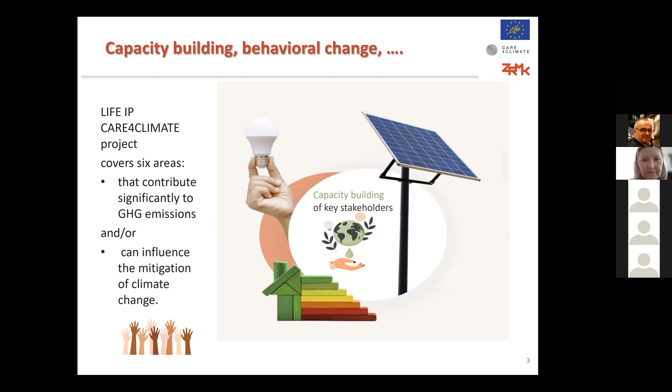In my presentation, I was asked to address the 2 important sub-projects relevant for capacity building of stakeholders. But as we are addressing nearly zero energy buildings in Slovenia in this event, I would like to draw your attention to our current activities in this sector.

From the year 2015, we have a national definition of nearly zero energy building. This is called the technical definition, and it defines the maximum energy need for heating in nearly zero energy buildings. In practice, that means all such buildings should have a demand below 25 kilowatt hours per square meter per year, or they should be ranked into class A1 to B1, which means very good thermal insulation and mechanical ventilation with heat recovery. In addition, it's required that all such buildings should have at least 50% renewables and meet the target regarding primary energy, which is closely correlated.

We have requirements for new buildings, but also for buildings that are subject to major renovation, and that is also reflected in our long-term strategy for renovation of existing buildings by 2050.

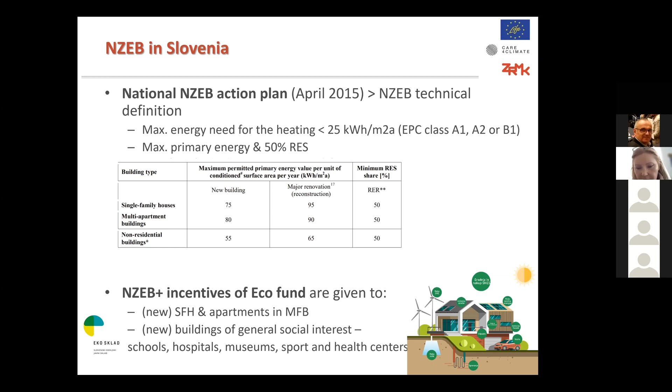In Slovenia, we are currently waiting for the new building codes, which will bring NZEB design closer to our architects and engineers, giving more practical requirements and guidelines for design of such buildings. We are just waiting for the promulgation of this building code.

We took into account the cost optimality study, new EPB standards, and the new approach required by the European Commission. We are strictly prioritizing renewable energy sources, as foreseen in our national energy and climate plan for the building sector. We also studied and updated primary energy factors so we can take into account exported energy and new arrangements for energy self-supply from local production and community solutions for renewable energy.

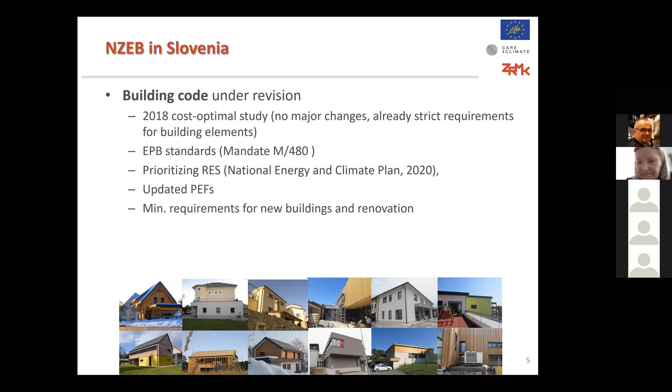What are the plans of the long-term renovation strategy for 2050? We have ambitious targets for reduction of greenhouse gases in the building sector by 70% by 2030. In 10 years we have to reach significant progress in changing existing heating systems, where heat is generated individually per building. It is foreseen that in the next 10 years, two-thirds of the systems will become powered by renewables.

An important issue is that we are not talking just about deep renovation, about at least 60% reduction of primary energy with renovation. We are working on rehabilitation of existing building stock in the sense of wider renovation. That means we will take into account seismic renovation, fire safety, and flood issues, which are becoming more important in Slovenia. Seismic renovation is especially important in Central and Eastern Europe, where this field has been a little neglected for many years because of the large investments needed.

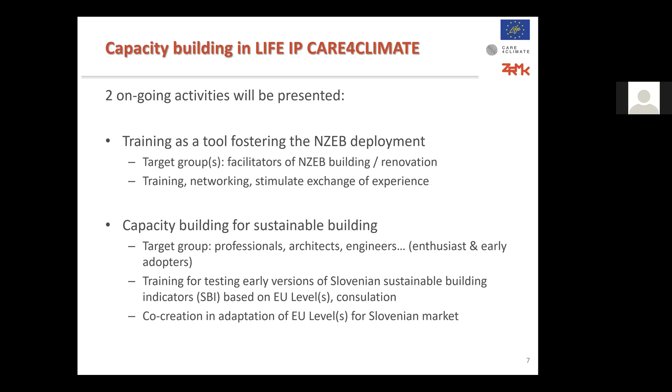What I would like to stress here is that this process is going on as a co-creation process. Stakeholders, architects, investors, and the public sector are invited, and they actually cooperate in communication on the development process.

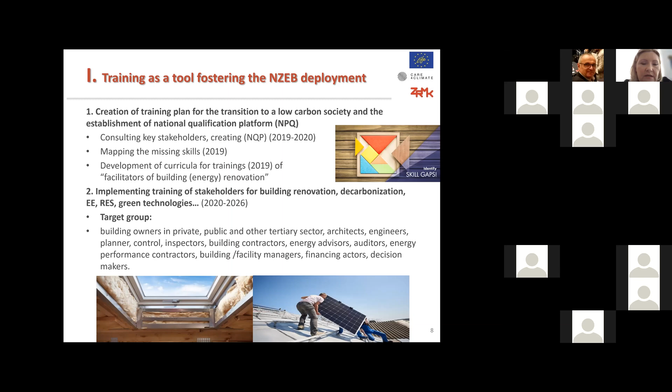How are the trainings going on in Slovenia? In the LIFE IP Care4Climate project, we started with development of a training plan, identification of topics, and mapping the needs in the sector. Back in 2019, we prepared curricula and developed the trainings.

Then we continued with development of more tailored trainings for different stakeholders: private sector, public sector, tertiary sector, architects, engineers, planners, control engineers, building inspectors, construction and building contractors, and all those offering energy services to the building sector, like energy auditors, ESCO companies, and facility managers.

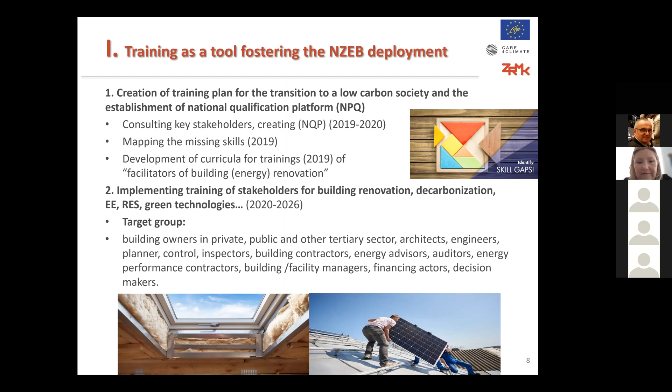We would like to attract more financing actors, banks and similar, to our training. This is currently a bit of a challenging area.

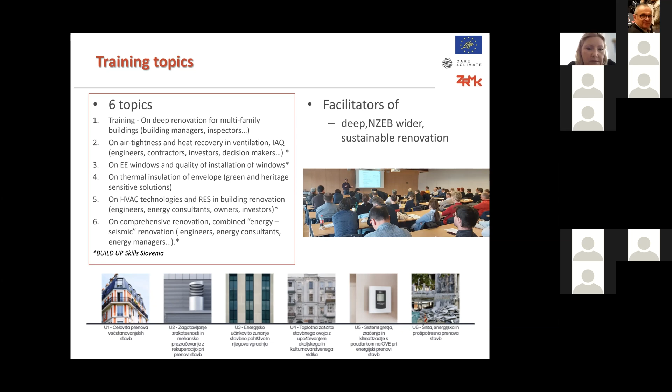We have 6 main topics of trainings. The first is deep renovation of apartment buildings. Apartment buildings are very specific in Slovenia - most of them were privatized back in the 90s, and by law they are managed by building management companies, who are important facilitators of deep renovation. We want to move our activities from just changing windows or installing insulation to deep renovation, together with planning, design, selection of good contractors, and control of implemented works.

And meeting the targets of renovation. The second topic is about air tightness and heat recovery in ventilation, and indoor air quality, which is a hot topic now in the COVID situation. Here we address engineers, contractors, investors, and all decision makers, in various details of the training. The third topic is energy efficient windows, quality of installation of windows, and advanced glazing technologies.

Also with PV elements installed in integrated facade. The fourth topic is about thermal insulation of the envelope, with a special focus on heritage buildings. We know that heritage buildings are somehow eligible for some less stringent requirements, but still many things can be done in deep renovation, also in heritage buildings.

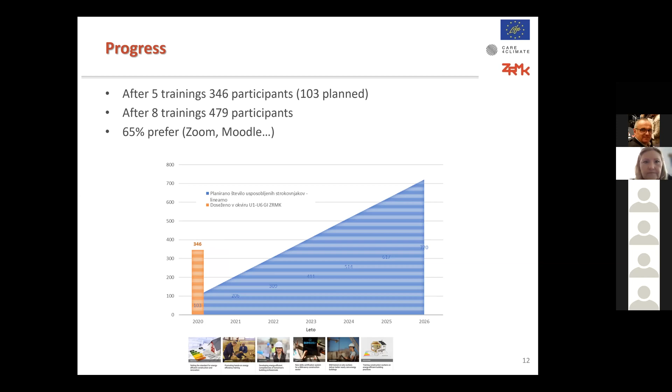So what are the open issues in Slovenia? It is clear that we need better skilled professionals. We are working with them to facilitate the preparation and implementation of renovation projects, and we are supporting them in uptake of green technologies. Nevertheless, a lot has to be done in this field. What is important is also that we have to work intensively to actually use all the financial sources which are available for public sector and also for private sector buildings.

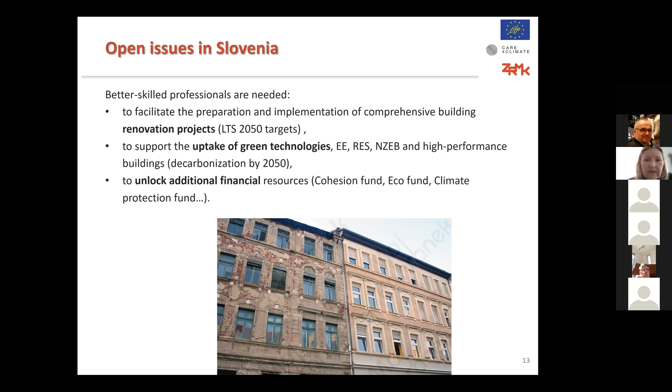The next challenge is about non-formal learning, and about getting sufficient recognition of these non-formal trainings that participants are taking part in. What we are working on is to get a legal background for development of professional qualifications for all the professionals who have already invested a lot of time and effort in gaining new knowledge. And it is important that the market of renovation becomes aware of the fact that there are professionals who have the required knowledge and skills to do deep and NZEB renovation.

The next open issue is to get the social recognition of new skills, so that the investors, the buyers of this professional service, actually become aware of skilled professionals.

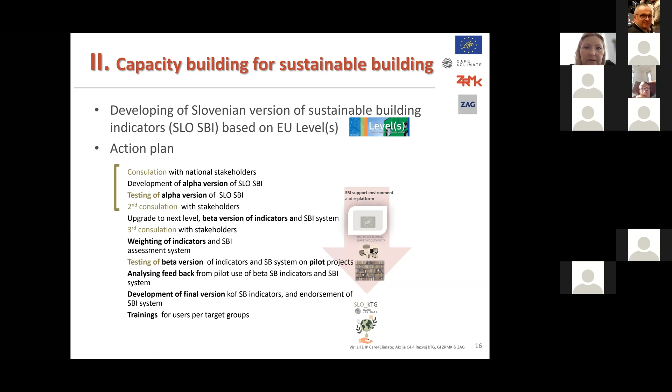And the second activity which I would like to present is capacity building of Slovenian stakeholders in the field of sustainable building. I already mentioned that we are developing a Slovenian version of sustainable building indicators based on the European framework, Level(s). We have prepared a so-called alpha version of Slovenian indicators, and those indicators are now available on our project website for all interested parties, for designers, for investors, and for researchers interested in this field. They have introductory training available.

And they have an extensive e-classroom where they can get informed about the details of the calculation of indicators. There they can also get first examples of calculated indicators, and what we are asking them is to join us to co-create the system, because next year we will start with 2 or 3 pilot projects from the very beginning in order to use the Slovenian version in real life.

The final idea of the Ministry of Environment is to integrate the Slovenian adapted indicators of Level(s) into the Green Public Procurement Regulation, and most likely also as a general rule of design for new buildings in due time.

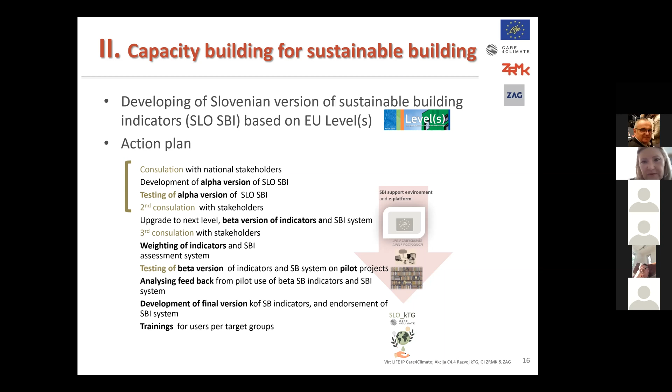The process of development of indicators is very open, so we cooperate not only with ministries, but also with institutes, with market actors, with relevant parties joined in the steering committee, and with chambers of engineers and architects, in order to come up with an implementable version of indicators for building sustainability.

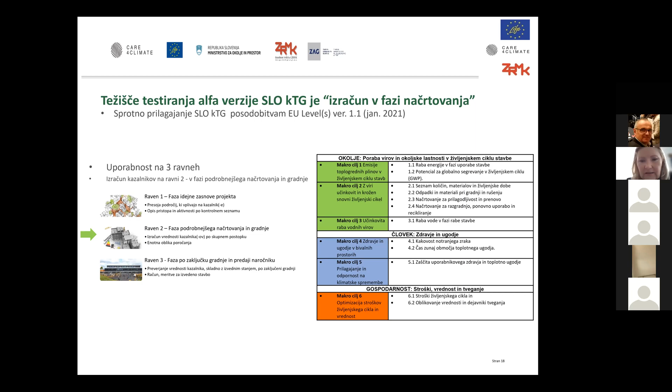By now, the scope of the testing of indicators lies in the detailed design phase. We have offered 11 indicators adapted to the Slovenian situation, with a few more in the pipeline. The aim of the testing phase is to check the applicability of indicators in the real life of project design. There we would like to learn about the methodological gaps and the data gaps.

We are aware of these problems in Slovenia. We would also like to learn how compatible the calculation of indicators is with the construction process. In this respect, I am very glad that in the next presentation we are going to talk just about that, about the relation between BIM and building energy modeling. It is important for calculation of the first sustainability indicator, about energy use in the operational phase, and also important for calculation of the CO2 footprint of the building.

We would like to get examples of calculation. There is nothing about being right or wrong in the calculation; it is just about getting feedback on what is feasible and what is the most appropriate solution for the Slovenian situation. Testing has started. We are planning hybrid events for training of all those interested in the testing process, but online presentations are also available. So we want to be as flexible as possible.

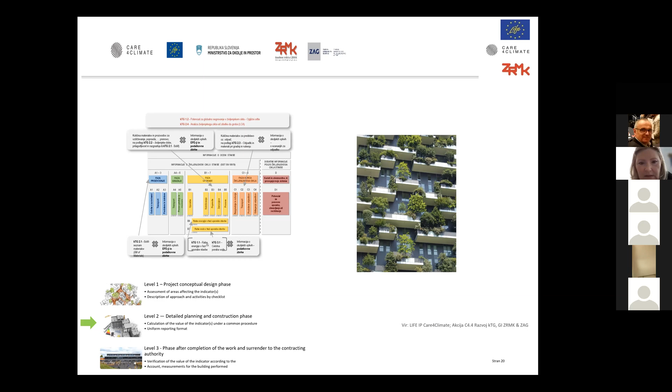This is how it looks, the video lectures and the testing platform for sustainable building. All Slovenian participants to this event are also kindly invited to join us and co-create with us the sustainability indicators for the Slovenian environment. Thank you for your effort and listening to my broken voice. Thank you very much.

Thank you, Mariana. Yes, I'm here. Don't worry, I apologize. No, I know the feeling - yesterday I had the same situation. After the whole day of meetings, I was voiceless, actually. I don't know why this is, but that's the consequence of web meetings, I think. Yeah, indeed, probably. Maybe because we are in too dry places, and that's an issue also for us talking. I don't know, this is just a thought about that.

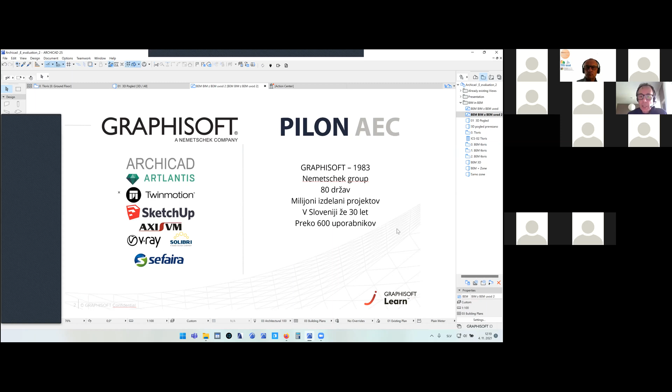Graphisoft has been around for almost 40 years. It's part of the Nemetschek Group, which currently sells and services software in more than 80 countries around the world. There have been millions of BIM projects already developed inside Archicad and other Nemetschek software brands. Inside Slovenia, we have been selling and using this software for more than 30 years, and we currently have more than 600 active users of Archicad, and this number continues to grow.

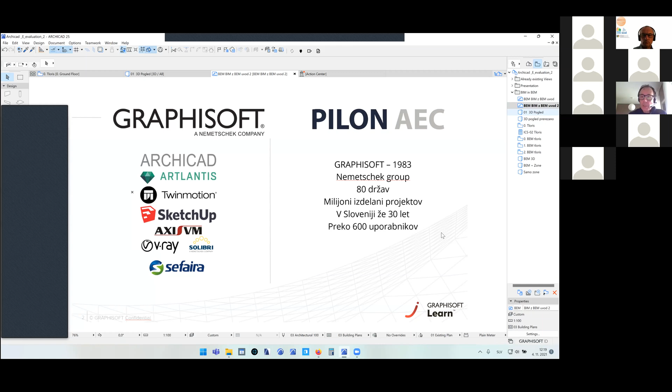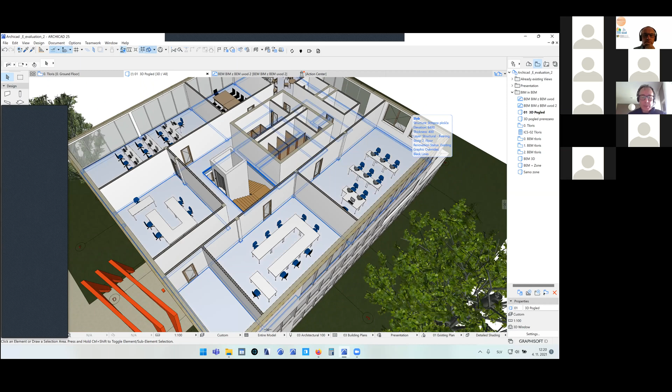So I would like to give you, in the next half an hour, a quick overview of the tools that have been available inside Archicad for more than 10 years. We are very sad that most of our users are not utilizing these tools, at least not enough for the purpose they were meant for. For the sake of this demonstration, I have a small building here. You can see it in 3D model. I can maybe cut it through one floor so you can see a little bit inside. Let's say that this building is in the design development phase.

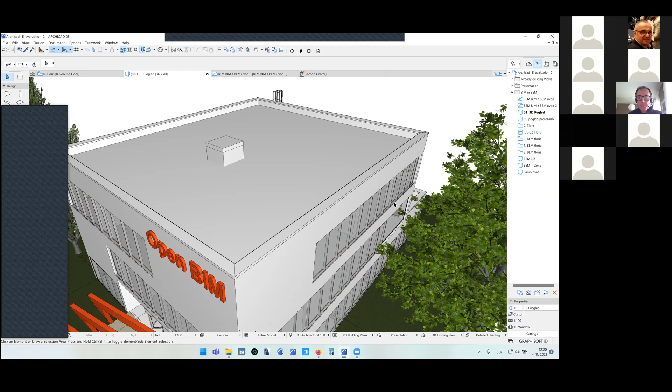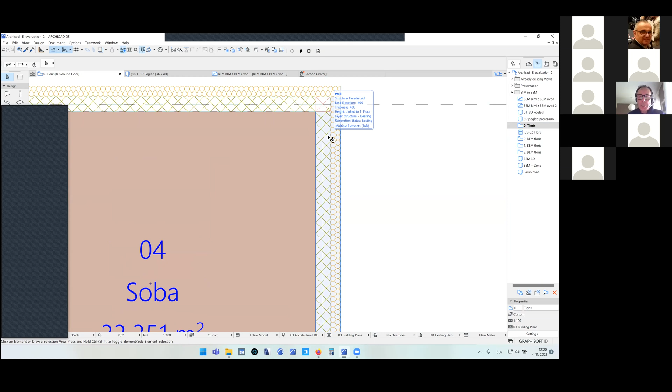For those of you who are not familiar with Archicad or other BIM tools, let me share some background on how a BIM model is supposed to work with regards to building objects. The fundamental difference between BIM modeling applications and traditional CAD software is that although these floor plan pictures may seem similar to traditional building drawings, with these hatches and graphics on screen we can represent the building materials being used in this model.

But in BIM software authoring tools, there is much more than just graphic representation of building materials. If I open section building materials here, you will see that each of these materials attached into this composite has got a lot of different properties assigned to them. For instance, this reinforced concrete has hatching, surface texture for 3D, and beside that, physical properties like thermal conductivity, density, heat capacity, embodied energy, and embodied carbon.

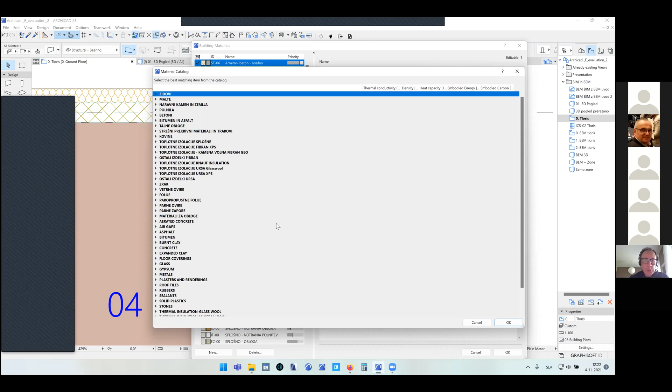Where does this information come from? It comes from a catalog built inside Archicad, and you can create your own. You can see we have international building materials, and also many Slovene building materials. If I look at insulations, these are generic insulations, and further down we have insulations from the company Fibran and, probably you recognize, Knauf insulation and Ursa glass wool. This catalog is open for manufacturers of building materials, and we can include it into pretty much every Archicad used in Slovenia.

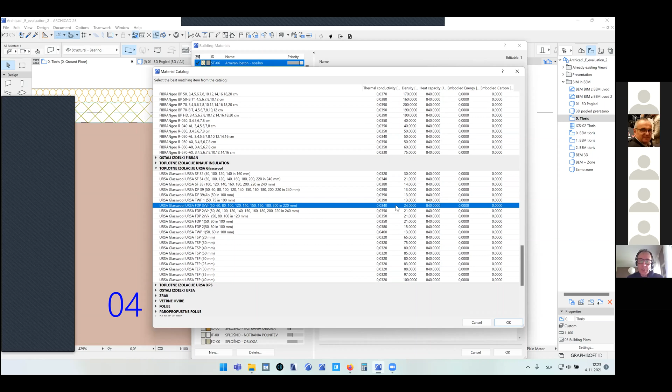For every material, we have these five categories that can be filled in. You can see that only the first three are included in the catalog, but every user can simply overwrite those numbers drawn from the catalog. For example, if he's using some special material not included in the catalog, he can overwrite these values.

The second important thing is that when we talk about BIM, we talk about cooperation between different stakeholders in the design process - architects, engineers, mechanical engineers, structural engineers, and so on. For this cooperation to be really good, elements should be properly classified when putting together a BIM model - not just elements, but also building materials.

If I choose to classify this concrete, you can see in the classification included in Archicad, we have classification by elements - walls, slabs, columns, and so on - but also classification for building materials. This classification brings to the building material much more than just these five or six properties.

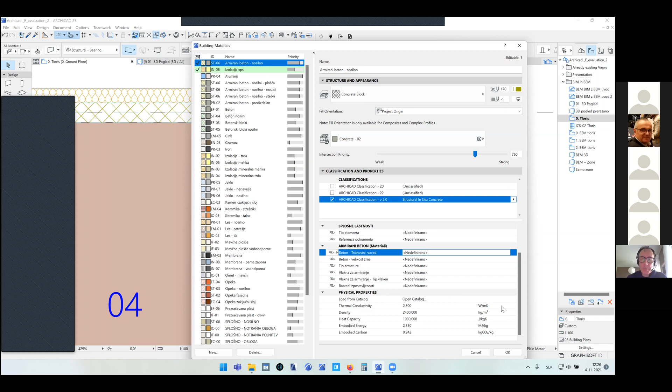If we choose some structural concrete, let's say in situ concrete, you can see that besides these few physical properties, we can define many other properties that will be included with every element using this building material. So when we send the BIM model to the structural engineer, he will get all this information. When we send it to the mechanical engineer for energy evaluation or calculation, he will get the properties significant for his work. So building a good building material library is very important.

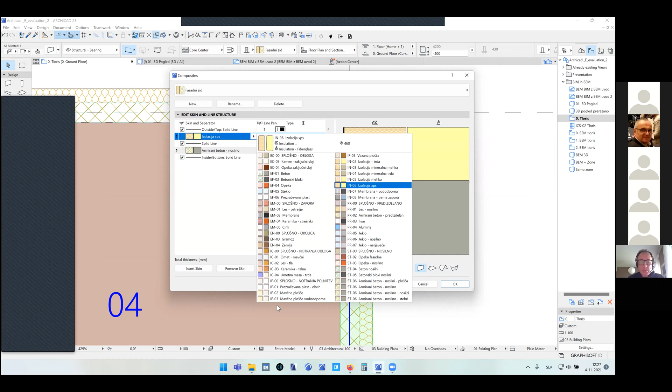The next thing is, when I choose this wall, I can see it's a composite of two materials. I can insert many other skins and materials - you can see this insulation here is XPS insulation, 18 centimeters thick, and I can choose from this building material catalog any material I would like, and assemble a composite from many different materials. This is very important when we come to the energy evaluation included in Archicad.

The next thing we need is to define our zones. In Archicad, this element is called a zone. Basically it's used for rooms, for defining the floor area of rooms, the volume of rooms, etc. But when we define these zones properly, we can then make a calculation of the energy efficiency of this building.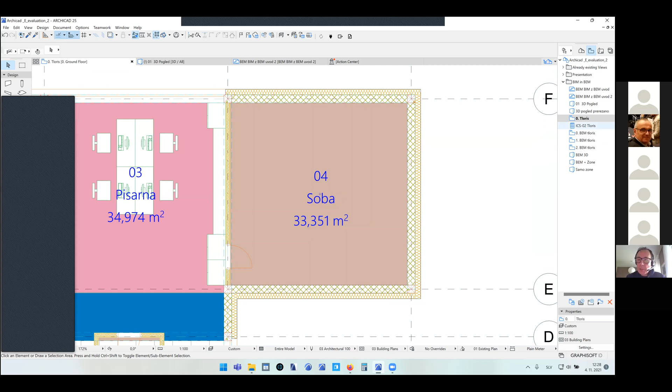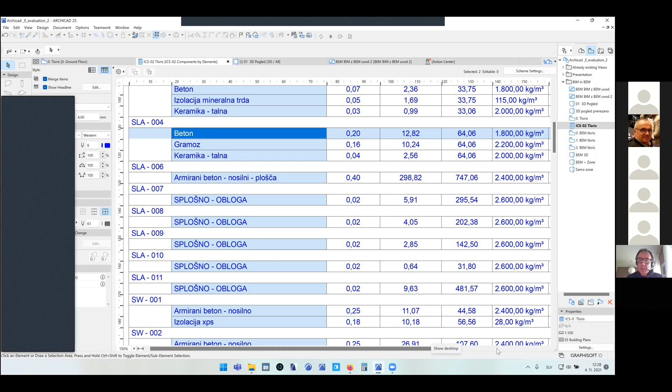So if I just show you this schedule that is created from this model, you can see that we have a lot of slabs and walls and so on. For this slab with ID 04, we have a concrete that is 20 centimeters thick. This is the area, this is the volume, these are the physical properties of this building material that I just showed you before. And this in itself is a very valuable tool to get to see what kind of materials we are using in our project.

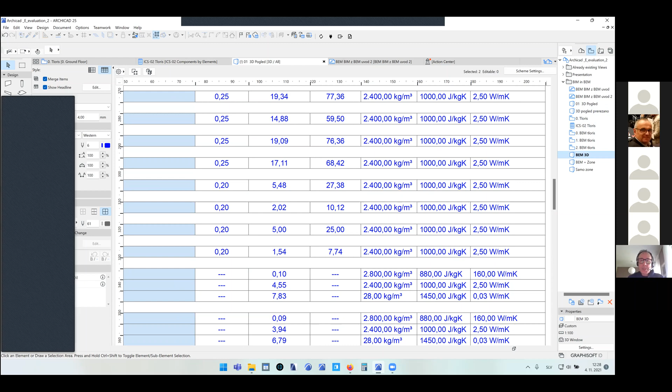But in order to get a good 3D representation of the building, a building energy model, we usually simplify our model, because every single detail can slow down the process of calculating. If the model is very exact, the calculation takes longer and errors happen faster, so to speak.

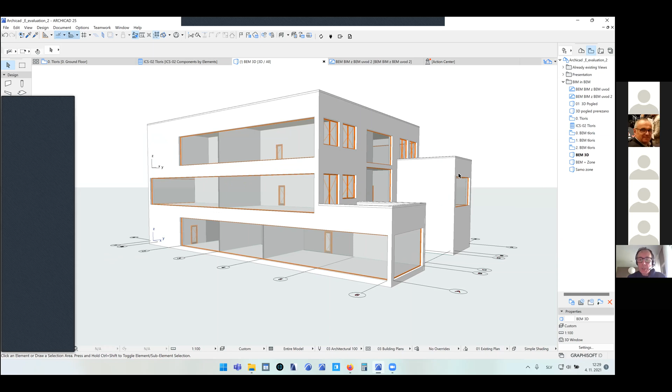So you can see this model is a little bit cleaned up, so we don't see any surroundings, trees, or furniture inside. The main goal here is to create these 3D zones that I explained earlier, which cover our building from the inside. When we are calculating a very small building, for example a residential house, the whole house can be represented as a single zone.

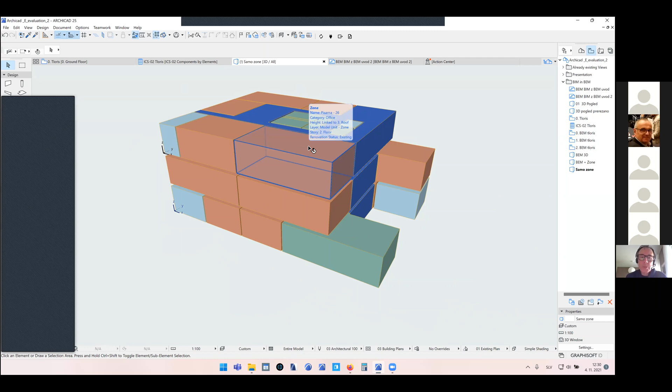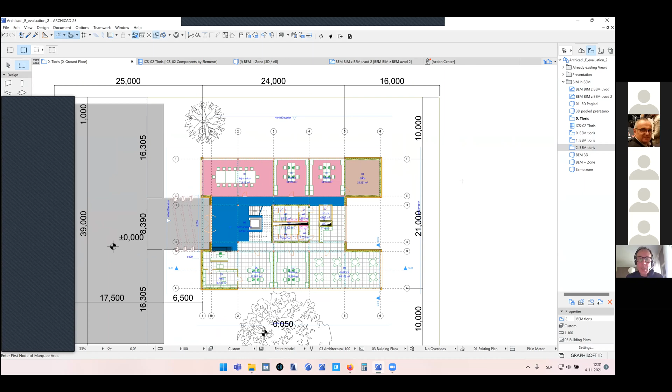These zones are typically meant to be assigned to different temperature zones inside a building. Because this is a medium-sized building, I have put zones in every room. If I show you this, you can see the model and the zones together. And if I select this area, you can see that these volumes represent the zones, the rooms.

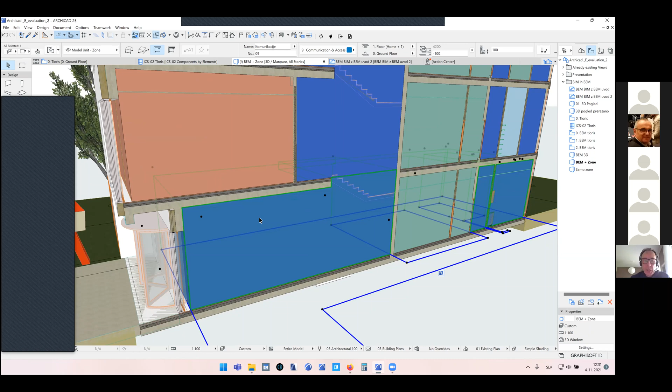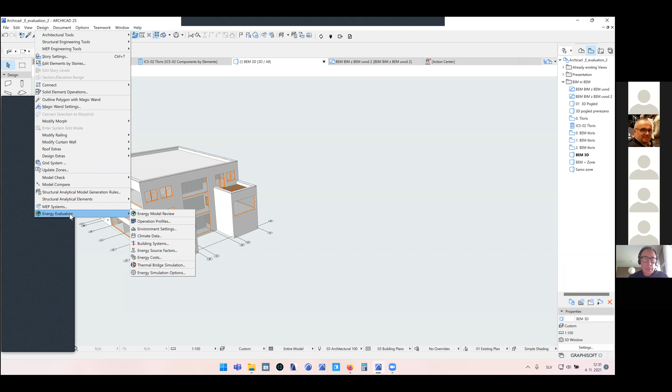Those zones must be carefully modeled. Each zone must touch the building elements precisely, so there mustn't be any gaps between the zone and the building envelope. I have already done this. This is the model, and now I will try to calculate the energy efficiency of this building.

Firstly, this is the tool I was talking about. It's called Energy Evaluation, and it has been included in ArchiCAD for the last 10 or 11 years now. I can simply hide the building elements and show only the zones, and you can see I have here two major thermal zones included in this building.

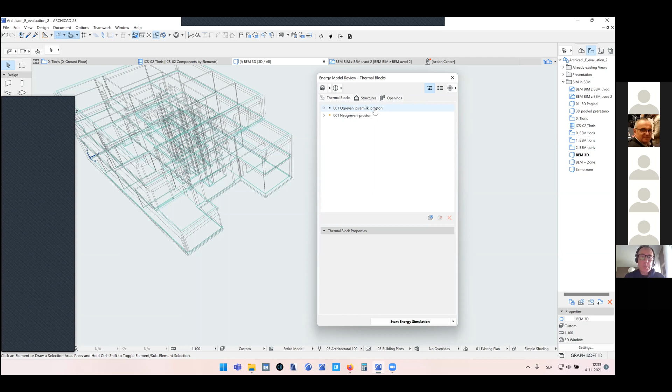The first one is the biggest, it comprises all these zones, the heated areas, office spaces. The second zone is unheated areas such as storage. I can extend this, and you can see every room has to be included in at least one of the thermal blocks, and I can have as many thermal blocks as I want. As I said, with a small building, you can have only one thermal block, and the entire building is assigned to this one block.

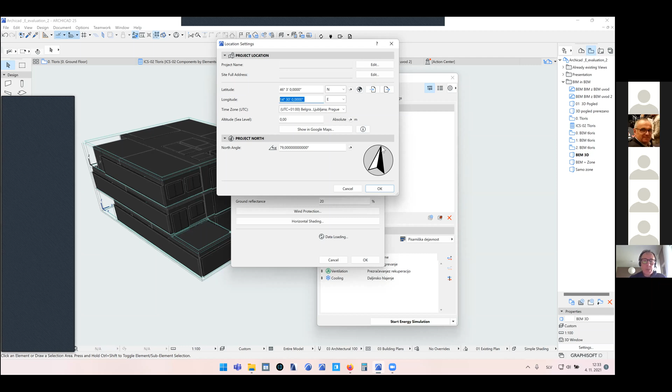Next, before we start our calculation, we have to determine some basic things. First is the location of the building. If I click here, I can choose a city from this list, or specify directly the longitude and latitude of the site. I can say where the project north is, the orientation of the building, and after that I get the climate data for this specific location.

Climate data can be incorporated through the StruSoft Climate Server. StruSoft is a Scandinavian company developing software for energy calculations, and they have their own server with information about weather and temperature conditions from all over the world. Or you can use local files if the country provides them. I have this one file which is for Ljubljana.

So these are the basic temperature and moisture settings. I can even select a different kind of climate type. If my building is sitting next to a river or a lake, I can choose moist. If it's on the seaside, I can choose marine climate type. Then I have all this different information coming from this file.

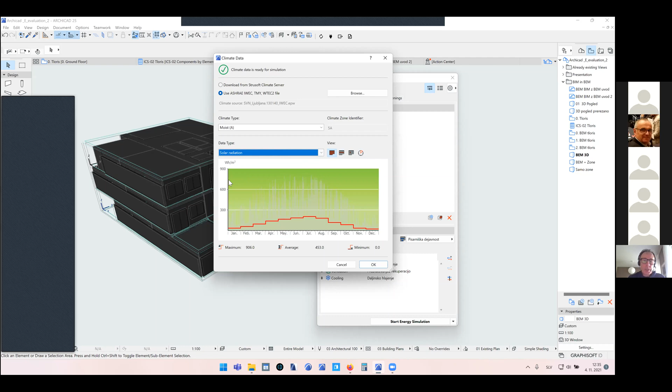I can display this information for air temperature monthly, weekly, daily, or even hourly. Same goes for relative humidity, solar radiation on this spot, and wind speed. For wind speed we also have this wind flower - I don't know the correct English name, but it indicates where most of the wind is coming from at this location.

So the next thing we have to do is define what ground the building is sitting on. Depending on this, you get these numbers. What is the surrounding around the building - is it a park, or is it paved. This all impacts the energy efficiency of the building.

With wind protection, we can either model external buildings or external elements that would block wind, or we can just use this. Let's say from the west we are well protected, there are some big buildings or a forest, so the wind will not impact our building from this side so much.

Next thing I'd like to show you is building systems. We have two thermal zones here, and for each of these thermal zones we define the building systems that will be used in this building.

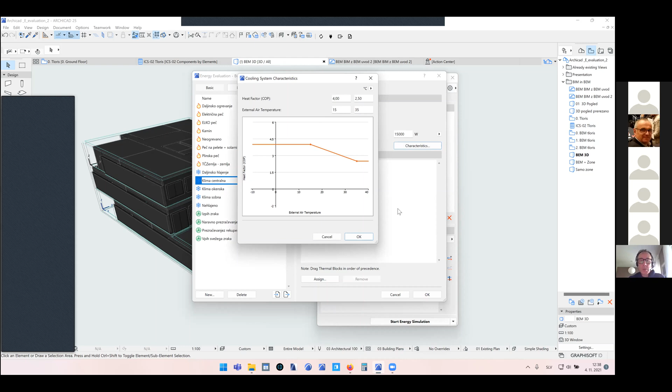So these are heating. For cooling, we can select cooling machine, district cooling, or we don't know yet - we'll wait for the calculation to see if we actually need a cooling machine or not. If I select it, I can set the cooling capacity, the characteristics, COP of the cooling machine, and so on.

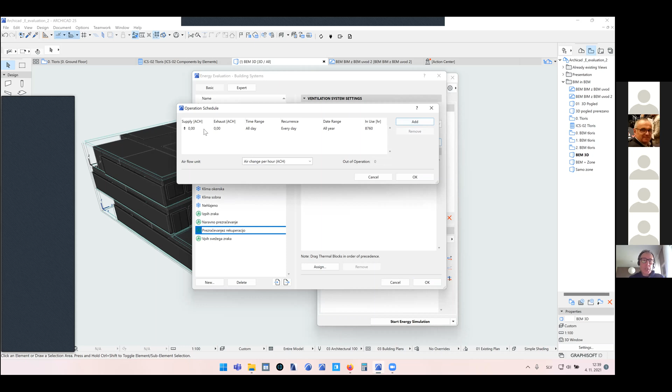About the ventilation system, you can have natural, where I just open windows, or mechanical, which is supply only, exhaust only, or both. Does it have heat recovery or recuperation, and when does this exchange occur - from which hour to which hour every day, how much air change per hour we would like to have, and so on. So we can set all these things up.

So for each thermal block, we can have different kinds of systems in place. Next, we have to define what kind of activity will go on in these thermal blocks.

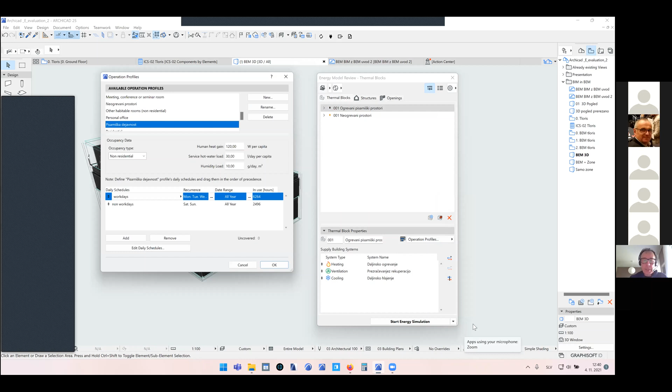For this it's pretty simple - office, this will be office space. If I show you the settings, this is office space, non-residential type of space. What will be the human heat gain?

How much hot water per capita will be needed in this heat zone? What is the humidity load? For example, if you're designing a fitness studio, human heat gain will be a lot higher, humidity load will be a lot higher, and so on.

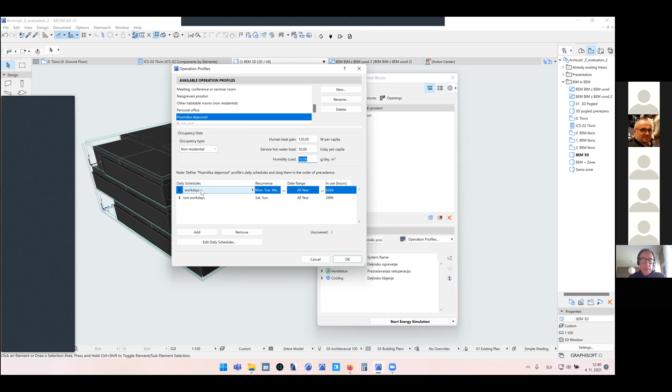You can also set daily schedules and the temperature in which the building must operate. For example, from 7 in the morning to 16 hours, the temperature has to be between 20 and 26 degrees. After that, it can be lower or higher.

You can also switch off and let the building heat or cool down on itself. So you can have these different scenarios for each thermal block. Now we have defined all these things.

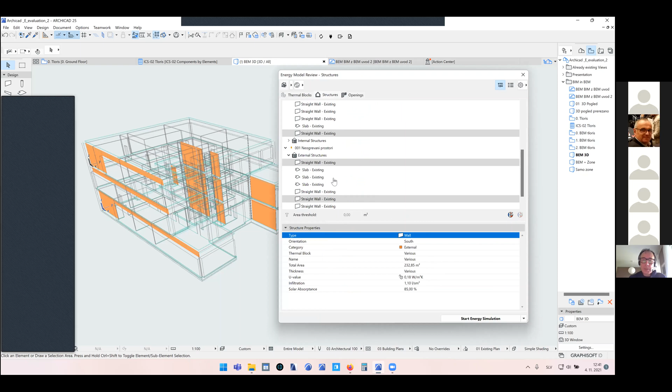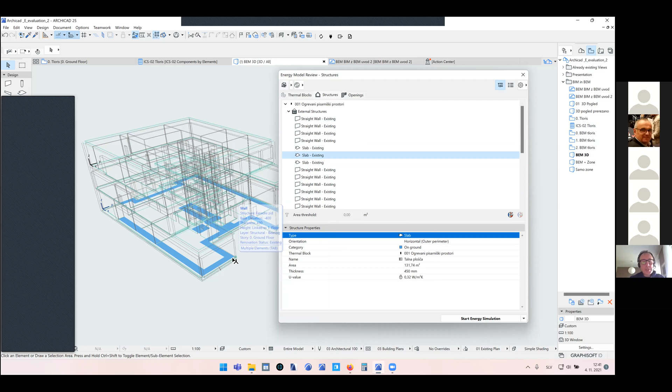Let's take a look at the building structures that are detected in this - just a little bit to extend this. You can see that the external structure, the building envelope, has some walls, some slabs - the bottom slab is automatically divided according to the distance from the edge of the envelope.

But I can also extend this information like this, and let me sort this by orientation. Let's say walls to the south - these are all the walls to the south.

You can see that this composite is displayed here, and according to the building material that has been used in this composite, it has calculated that the U value for this wall will be 0.18. I can still go and check this value.

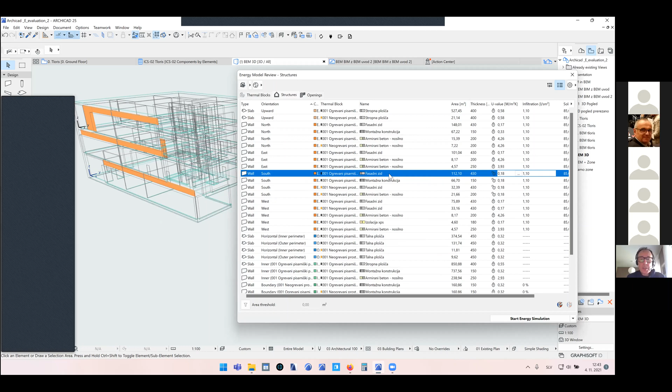If, for example, the building will be put together by prefab elements, and the manufacturer guarantees that this wall is certified for, say, 0.15, I can just put the value in here and not bother with the materials because they are not important anymore. You see this lock/unlock symbol here - if it's unlocked, that means the value has been put manually. If it is locked, like on these walls, it is calculated from the materials itself.

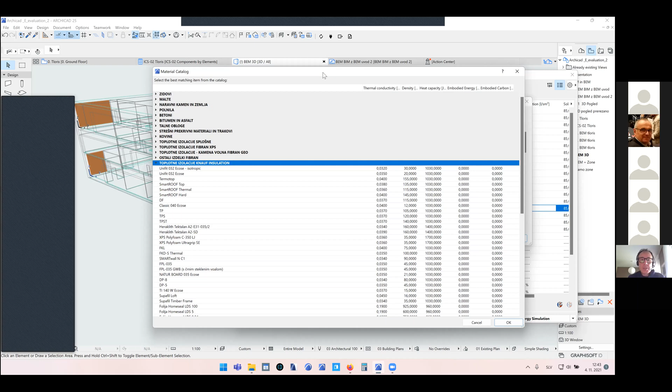I can also change materials, so I can make a very quick comparison - a what-if scenario. For example, if I'd like to exchange this XPS insulation to see what happens with another insulation type, I can do it just by changing the material in the catalog without ever touching the BIM model. Just change material, run the calculation again, and see if there is a difference.

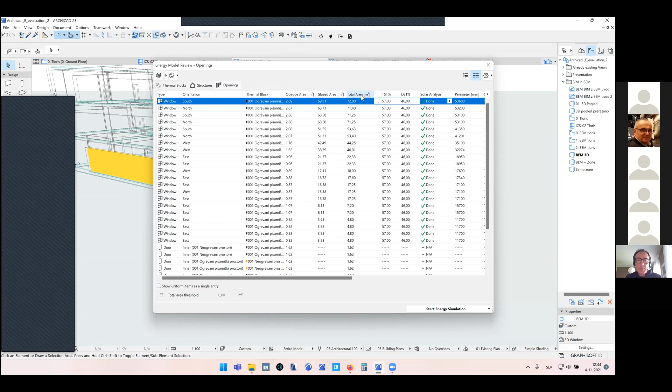So next, beside the structures, are openings, which are very important too. If I select one opening, one window - the big glass window on the south side of the building - I can see the area of this window, opaque areas, the frame and others, the glazed area, total area, total solar transmission, and so on.

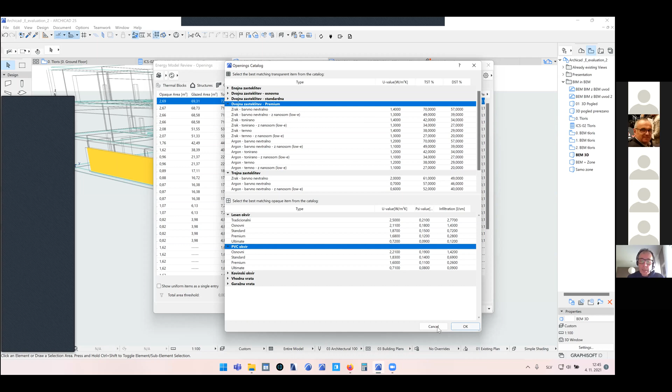I have other values here that are calculated from the element, or can be selected from the same catalog previously shown for building materials. We also have a catalog of windows and doors - triple glazing, double glazing, with air, with argon, or something like that. What is the frame standard, plastic, wooden frame, and so on. Each of these selections contributes to the U value of the window.

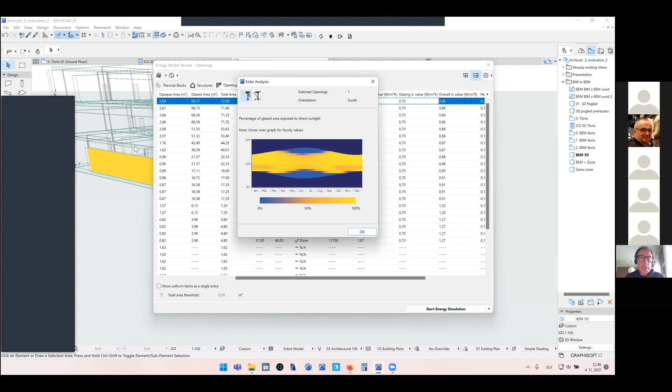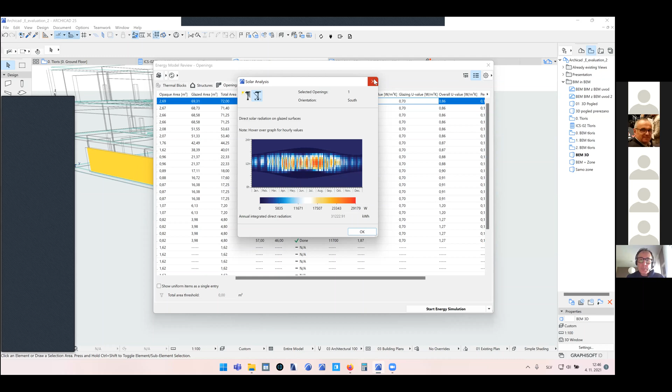We also get the solar analysis for every window. For example, for this window, you can see because it's turned to the south that it's sunlit almost the entire day, except in June or July when the sun is really high, you get a little bit of shadow, but otherwise it's completely lit. You can also see the amount of sunlight, sun direct radiation, getting through this window through the entire year, so you can check for overheating certain rooms or areas.

Now that we have done all this, I can start this energy simulation. I will choose just continue. It's reminding me that some of the zones have been changed and I didn't update them, but I will just ignore this and go to the calculation. This is a demo model that I move around very much, so don't expect exact calculations, but you can see that this calculation is very, very fast.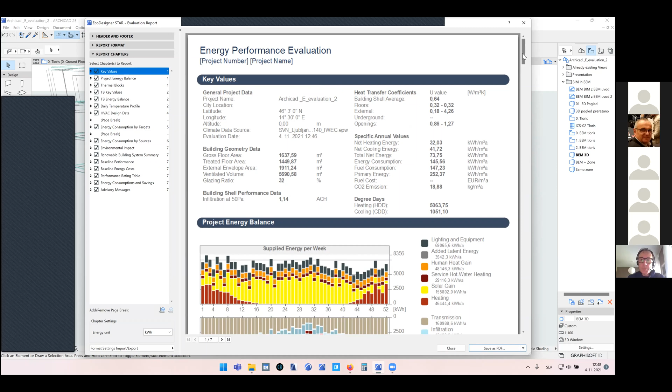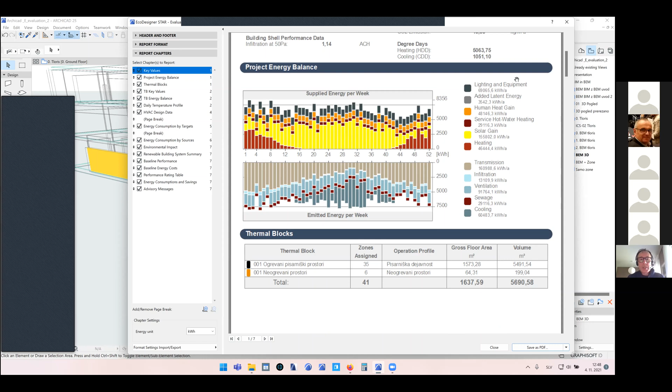It takes less than a minute to do this report that is being made right now. I have to remind you that this energy evaluation tool included in Archicad has its own big brother, called EcoDesigner Star, which I am currently using because I have the license on my computer, and it automatically uses the license if you have it or not. But the principle is practically the same, only this report is not so detailed - a few pages are missing in the free version compared to EcoDesigner Star, which is an extra add-on for Archicad.

So you can see there is a quite nice report about the building itself, the location, the total gross area, floor area, and so on. We have specific annual values - how much energy, kilowatt hours per square meter annually, we need for this building, how much energy for cooling, how much is the total energy consumption.

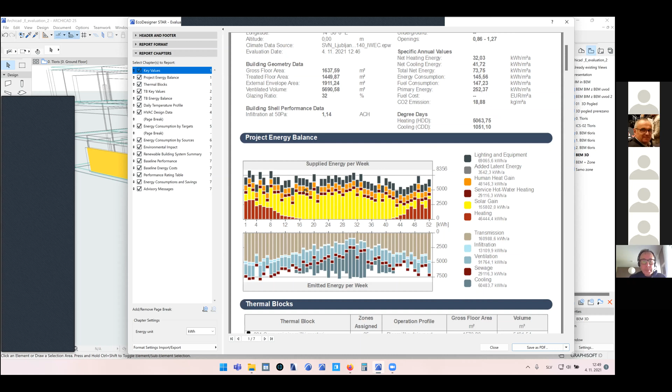We have this project energy balance graph right here, so you can see on which days we have enough sunlight, on which days we need heating, on which days we need cooling, and so on. Further down, you get the basic values for the entire building.

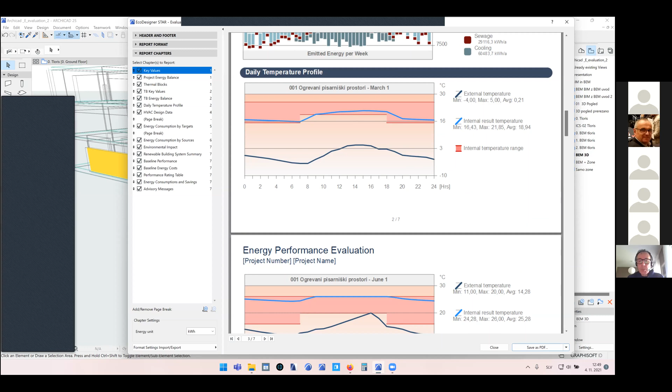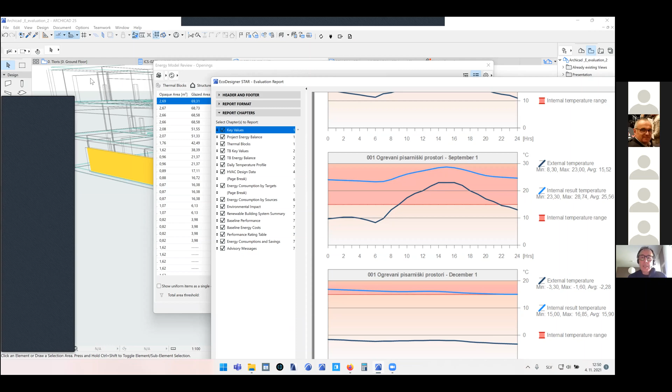If you have this EcoDesigner Star module on top of the energy evaluation included in Archicad, you can get a precise calculation for each thermal block, and for each you can also get a calculation for each room separately. For example, if one room has too many windows and is getting overheated or overcooled in the winter, you can get a warning about this, because the calculation is done for each room independently, and you can pinpoint where the problematic areas on the building are. You can save this calculation as PDF, and export everything here to an Excel spreadsheet.

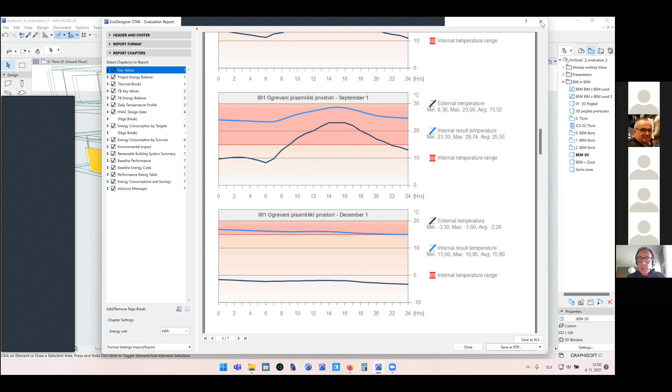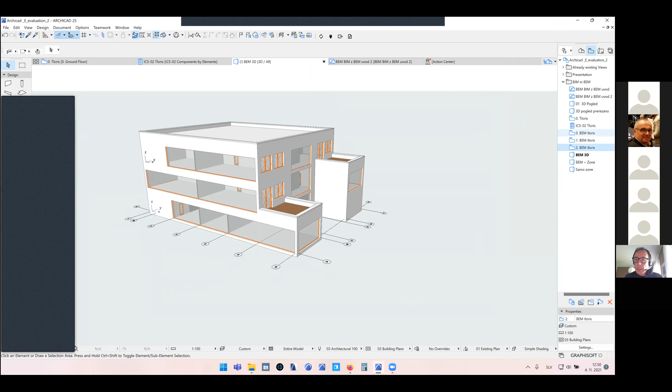I won't do that right now. What I would like to show you again is one more feature that is included in this add-on, EcoDesigner Star, that is sold separately. If I go back to the floor plan, I would like to get a section through this wall right here, and look upwards.

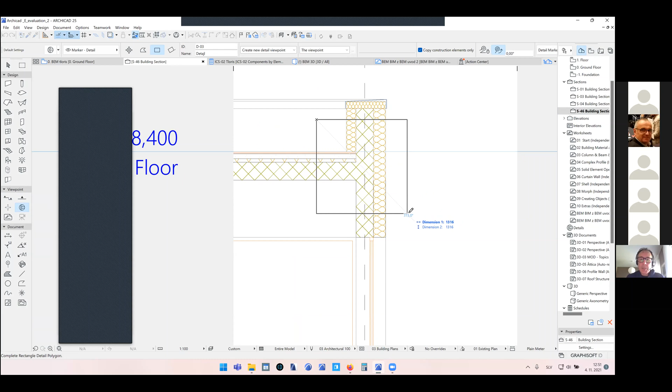If I now open this section, I believe it's S46. This is my section now. What I would like to analyze is thermal bridge properties of this detail. All I have to do is select the area I would like to calculate. This is my detail called D03.

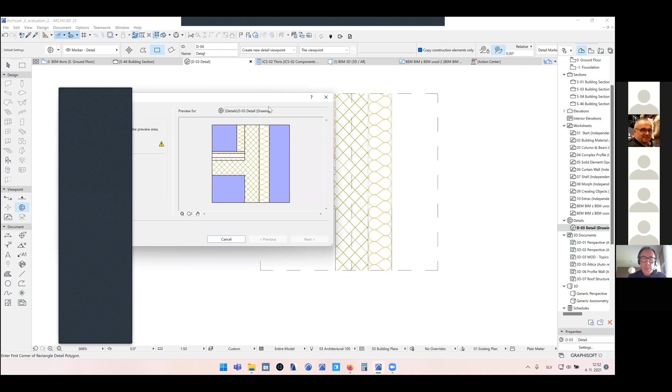If I go to details, this is what I have. And now if I select this tool, thermal bridge simulation, you can see this is exactly the same detail. Now I have to define what is the outside of the building and what is the inside. Define external area - I will choose this is external and this is external.

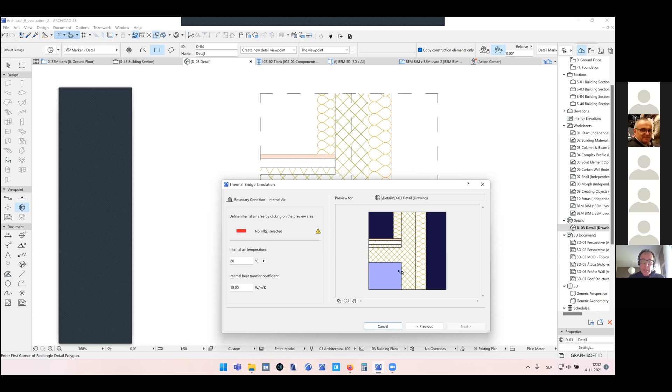What external temperature would I like to calculate for? Let's say 0 degrees. I'll go next. What is the inside of the building? This corner is the inside of the building. And what is the internal temperature preferred? Let's say 22 degrees. I'll go next.

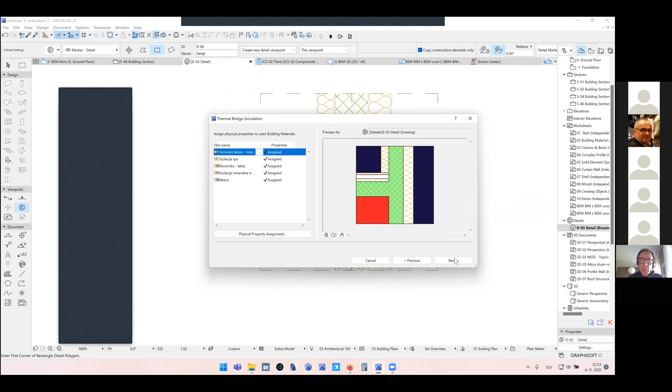If I would choose a detail that is touching the ground, I would now have to select the area which is touching the ground. In this case, there is no ground, just external and internal space. I will ignore that, go next. You can see it has identified all the building materials that we talked about earlier. I can still go and change this material, so I can make many calculations very quickly. I will just confirm this.

How detailed I want the simulation to be - I will put it to maximum, start the simulation, and you can see we got a really nice picture with all the information that was calculated. I can place this inside my detail. I will just move it a little bit to the side. And you can see that we got the thermal bridge calculation for this specific problem that we have identified on the building.

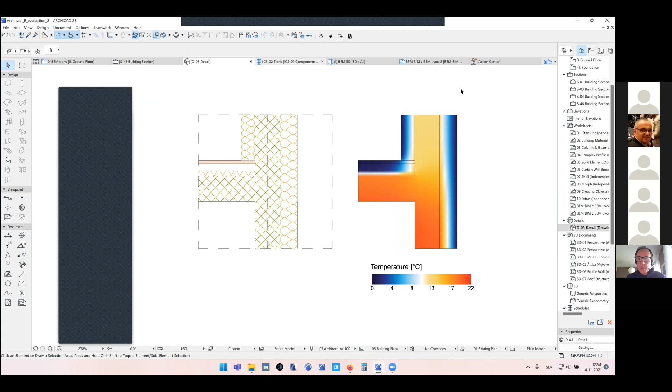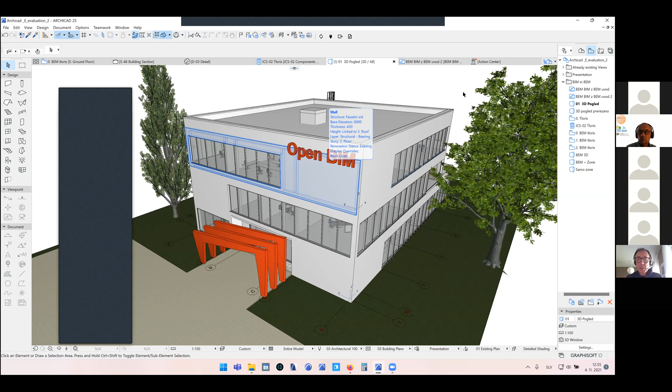So this is pretty much all that I wanted to share with you. If some of you are ArchiCAD users, I hope I have inspired you - these tools are included in ArchiCAD for 10, 11 years now. Please use this, because you can get very accurate calculations of the energy efficiency of the building when you're just starting with the designing, when you just have a basic building envelope. You can already make a calculation according to the hourly method, which is not available, as far as I know, in any other BIM tool that I know.